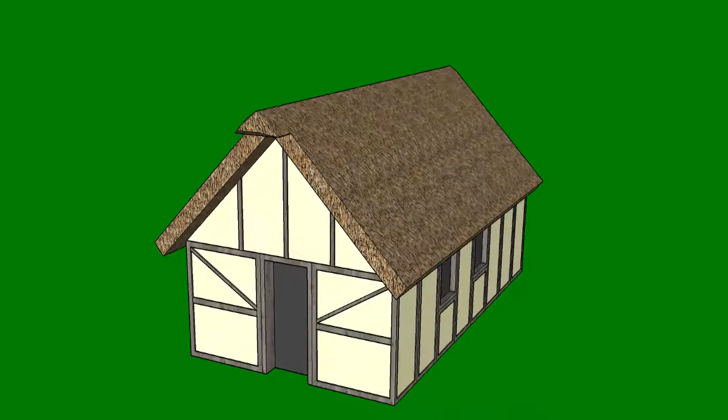We cannot guess how big this building was, and indeed it may have been made in stages, enlarged to cater for increasing numbers. We assume that it would have been more or less where the church is now, and aligned east to west, as had been the custom for many years.

Over time this wooden church may have been replaced by a more robust and larger stone structure, using local stone. This is likely to have been built prior to the Norman invasion, possibly sometime between 900 and 1000 AD. We have no way of telling, but the church may have had a simple wooden tower, with a bell to call the congregation.

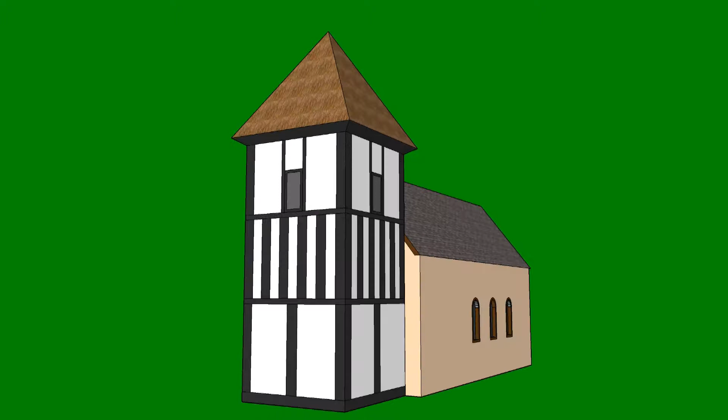It was during the Norman period, in the 1100s, that huge changes took place in church building, not only in Oribus but across the country. The French invaders were keen to stamp their mark on England, and church building helped them to make a visual statement to communities. In this period, the church that we know today was established.

Either using the existing footprint of the church or demolishing it and starting again, the nave was built, the heart of the church that grew over 1,000 years. The church would have consisted of the nave and the tower, not the tower we have now, but certainly the base on which subsequent towers were built.

At this point the altar would have been contained within the nave, but canon law required the communion and holy text to be kept protected from the congregation to avoid any irreverent access. This resulted in the chancel being built in the 1200s. The chancel would have become the most holy part of the church and separated from the congregation by a screen.

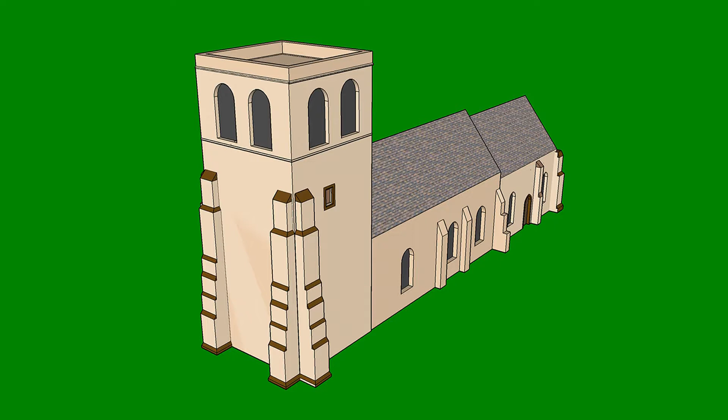As the village grew, so did the congregation. The easiest way to accommodate more people was to build an extension on the nave. These are known as aisles. The first aisle to be built is usually on the south side of the nave, as at All Saints. Our southern aisle extends a little way over the chancel. This aisle was built in the 1300s, at the same time as the tower we see today.

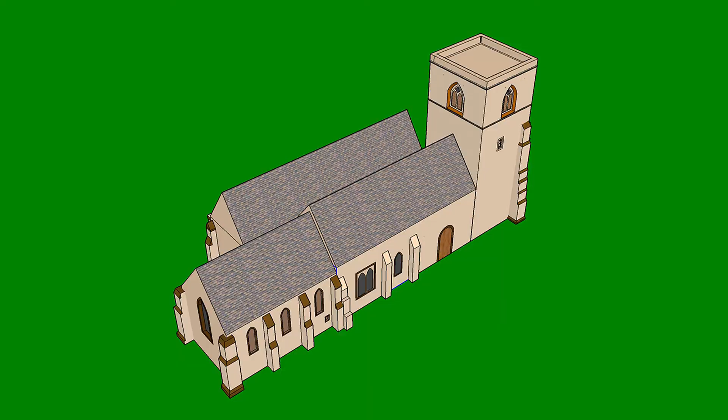During this period, the walls would have been highly decorated with religious paintings, a small sample of which survives in the chancel. Little is known of what happened in the 1400s, but in the 1500s the roofs of the nave, aisle and chancel were raised, and a row of windows called clerestory windows were installed. This gave the inside of the church a much airier and lighter feel, which exists to this day.

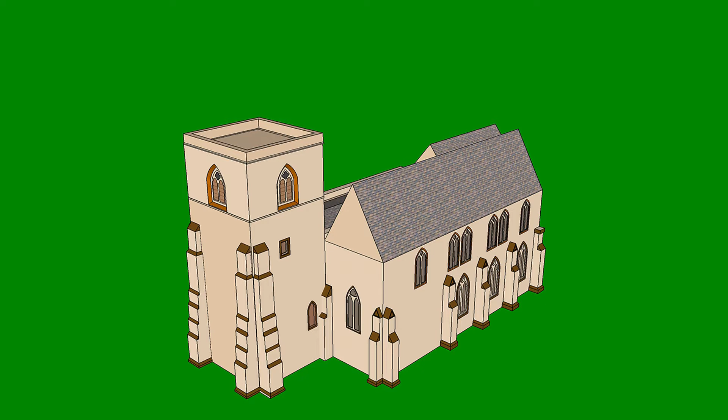The 1800s saw huge changes to the church as the Victorians sought to recapture the Gothic style. Pews were added, along with much of the stained glass. So was the south porch and lychgate.

The Reverend Webb paid for the north aisle to be built, to make the church bigger and symmetrical. He used stone from the existing north wall to build it. Unlike the south aisle, the north aisle only runs the length of the nave.

The church looks very much as it would have done in the 1800s, except the chancel screen has been moved, pews in each aisle have been replaced by chairs, and one or two modern contrivances have been added. There will no doubt be further changes, although the fabric now has a protection of the Church of England, English heritage and the listed building scheme. It's been here a long time, and will surely be around for many years to come.